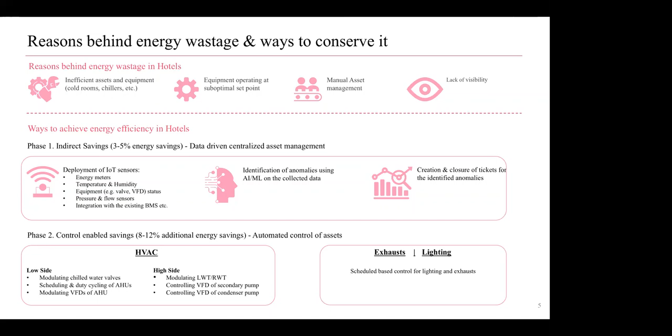And how do you then eventually get energy savings? If you do very detailed monitoring through different sensors, get the data, pass on that data to automated algorithms based on AI and ML, that create automated tickets which can then be rectified, and those rectifications lead to, let's say, 3 to 5% energy savings. You can then get an additional stage saving of 8 to 12% by doing automated controls.

These controls could be largely on the HVAC side, because HVAC consumes about 40 to 60% of the energy consumption in buildings. Within HVAC, it could be on the low side, high side, and then beyond HVAC, you could control exhaust and lighting as well.

Rather than being more theoretical, I'll let Mr. PK talk about his 4 decades of experience and how he has seen wastages in buildings and how he has worked on overcoming those wastages. Then we'll go deeper into the technical aspects of it. So, Mr. Goel, over to you.

Thank you, Amarjeet. Thanks to ISHRAE chapter for inviting me on this important webinar. I'm very happy to see that a large audience has joined this webinar on this important topic. My experience with air conditioning, HVAC, and controls goes back almost 3 to 4 decades.

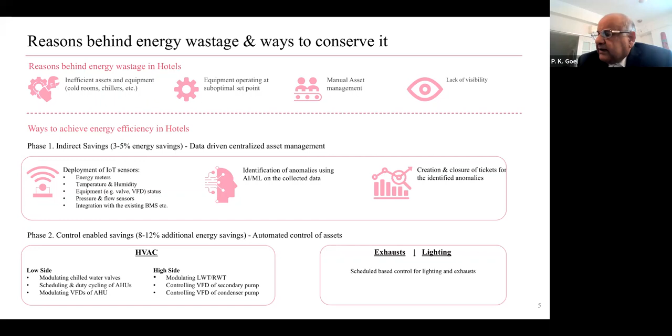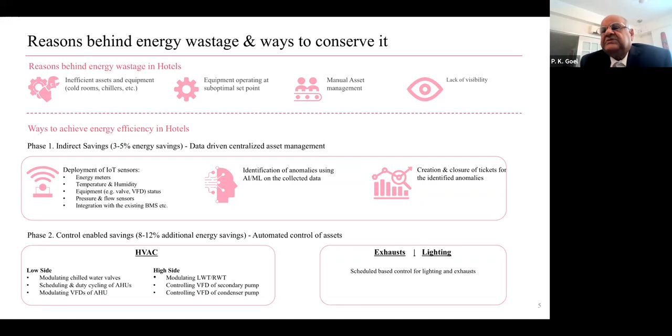So over to you, Amarjeet. Thank you, sir. I think you very nicely summed up all your 40 years of experience into a few key points, right? That connectivity is the future, right? All of us here, as we move into the future, whether as system integrators or HVAC engineers, etc., connectivity is going to be there in one form or the other, whether it is OEMs themselves providing connected equipment, or very easy to deploy, low cost wireless devices that can, in a plug and play fashion, provide data in a very, very easy manner, as you mentioned.

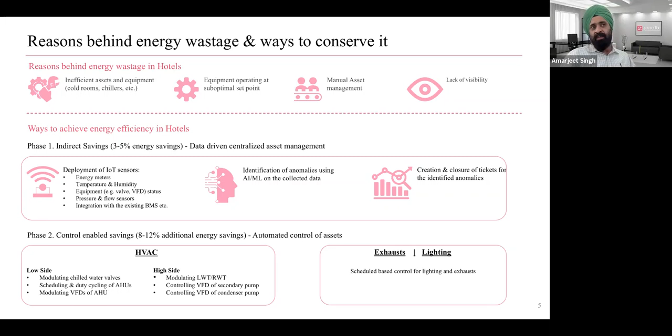So as this connectivity becomes a reality, which it already is, we can see how we can create a meaningful impact on global warming. I think this year is a real wake up call. The temperatures in April have been what we have never seen in the last 60, 70 years, right? Many of us were not even born in those durations, right? I think nature is giving us a wake up call that we better put our act together, right, and do our bit, or else the coming generations will suffer. And many of us who have kids really are concerned about that coming generation, right?

Buildings consume about 40% of the global energy, and within buildings, HVAC consumes roughly about 60% of the building energy, right? So overall, HVAC consumes roughly about 25 odd percent of global energy. And if we can save, let's say, 10-20% of that HVAC energy by doing the right things, we are talking about 2.5 to 5% impact at the global scale, right? Especially with this Russia-Ukraine conflict happening, etc., there are these global political and environmental impacts that are pushing us to put our act together.

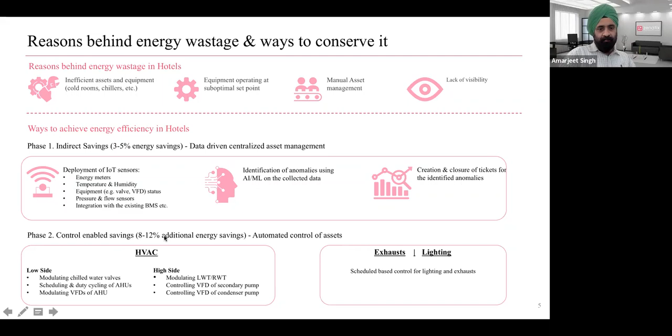So, where is the gap in the building management system, and why is there a need for IoT? Again, I'll use some statistics.

If we talk about buildings which are more than 100,000 or 150,000 square feet, in Western countries like Europe or US, 50% of the square footage of such large buildings already have automation systems in one form or the other. The same percentage when it comes to India is very low, roughly about 5 percent. And many of us know the reasons - many of us have seen several of these automation projects fail.

So of course, India and developing economies have a huge opportunity even for large buildings. But as Mr. Goel mentioned in the earlier slides, when it comes to smaller buildings, less than 50,000 square feet, globally it's actually a very big gap. Less than 2% of the buildings, even in Western developed economies, have automation systems, because the way these systems are built, they are very expensive, wired. If a building already exists and is operational, it's very difficult to deploy, very high upfront capex. So people can't justify the ROI. Very little centralized visibility.

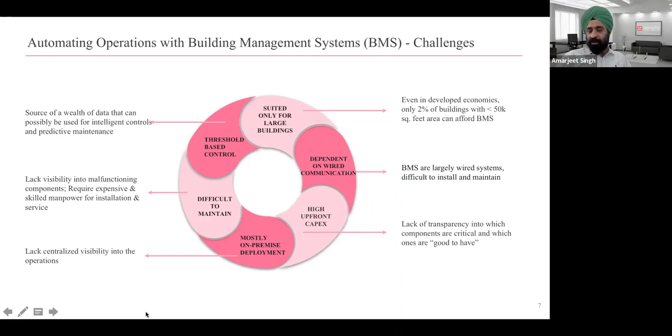I think that is where the world of automation, especially building automation with IoT, is moving. It's a paradigm shift that is going to happen in the next 3 to 5 years, and definitely India has that opportunity to be the global player, creating these new tools and technologies, not just for local consumption, but actually exporting them - exporting this knowledge created locally, made in India, built for the world.

Another thing, Amarjeet, don't forget our own tier 2, tier 3 cities. The Meeruts and the Modi Nagars and the Dehraduns may already have it, but the smaller cities - if we look at the penetration of BMS into our tier 2 cities, that itself is very small, and tier 3 is almost zero.

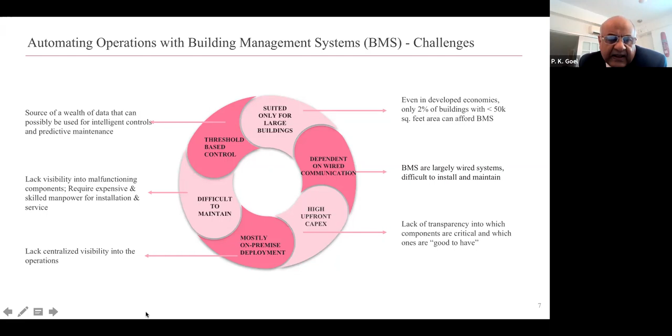With the newer stuff coming in, in 2 years' time you'll see a small vendor in a small town having connected systems. He already has internet thanks to payment facilities - he can't have UPI without a net connection. He doesn't depend only on the telephone line, he has a fiber connection even in a small place today. It's just an extension of that, and it has to come. This is development, you can't stop it. It's much better that youngsters get on this bandwagon. So I'll leave you to the presentation.

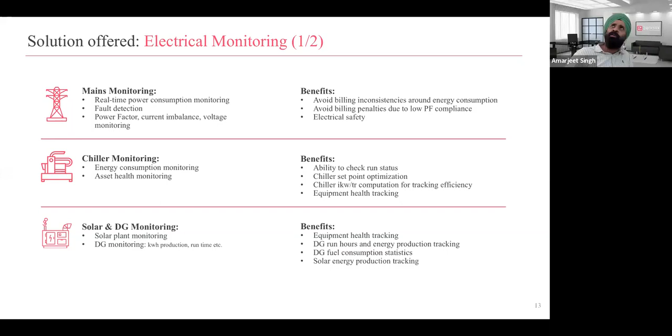We were telling them if there was potential DG fuel pilferage — whatever fuel they filled in, did they get enough units of production out of it or not? How many run hours did the DG operate at, and was it operating at the right capacity? You may have an over-provisioned or under-provisioned DG. All of these things can now be provided from the data.

We went further deeper into electrical monitoring at the low side of HVAC as well — AHU monitoring, exhaust monitoring, TFA monitoring, pumps monitoring, and within refrigeration units, phase-wise cold rooms and deep freezer monitoring, blast chillers. This gave us the health of the equipment, and since this is a catering company, it's also about food safety compliance — are perishable products being stored at the right temperatures, which is very important for them.

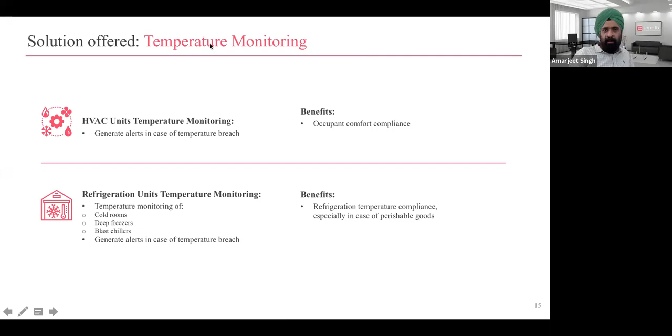Then we went to temperature monitoring. Within HVAC, we monitored temperature and generated alerts in case of a breach, and looked at whether occupants had the right comfort factors. Within refrigeration units, are they maintaining the right temperatures, especially for perishables? If not, is it because the equipment isn't healthy, or because the set points aren't maintained properly? All those actionable insights are given, rather than simply saying you're not maintaining the right temperature.

We went beyond monitoring into control as well. Beyond energy and temperature monitoring, we did direct control of AHUs, exhaust, TFAs, FAs, and pumps. We controlled several of them via VFDs — AHUs, exhaust, CT fans, and FA units. Direct control is the on-off control, and then we did control of some equipment via VFDs.

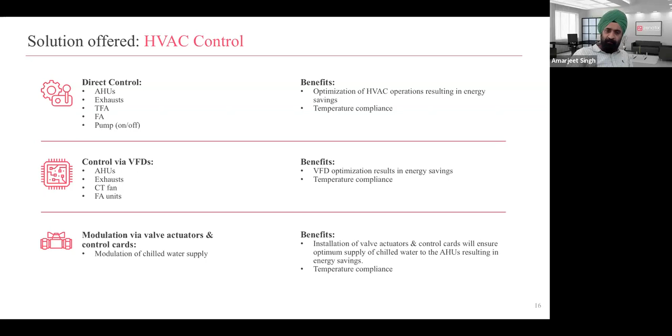We did modulation of the valves through our wireless IO cards, and they got deeper insights into whether any valves were stuck, or whether there wasn't an optimum supply of chilled water, resulting in energy wastage or temperature not being maintained properly.

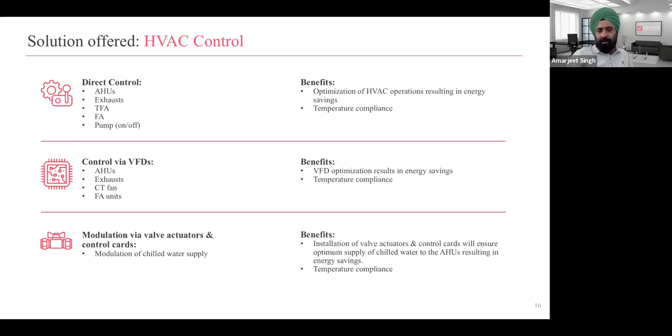So this was the real proof. We looked at the consumption for about 5 months before the system was installed, and for the 5 months after the system and automation were put in place. We showed real 14% savings on actual energy bills — it's not just that we were showing savings, the bills actually showed savings as well. The overall ROI was less than a year for them.

So these are kind of the ROI numbers, potentially unheard of. In the BMS, you don't even talk about ROIs in terms of energy savings. Here, we are saying that you do savings and you do get an ROI, and that is of course in terms of real money.

But beyond that, there is of course better temperature compliance. What does temperature compliance mean? For example, if a cold storage's ideal temperature is 2 to 5 degrees Celsius, and that ideal temperature is maintained for 16 hours out of 24 hours in a day, then the overall temperature compliance will be 16 divided by 24, which is 67%.

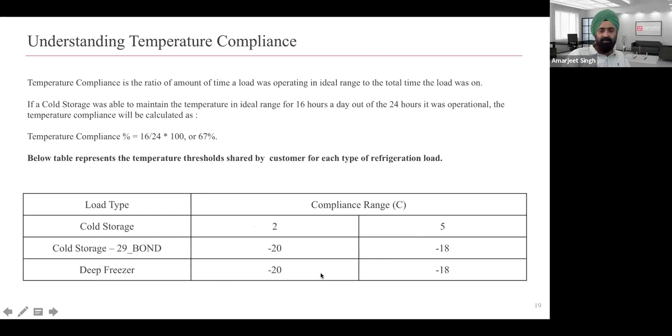So the customer gave us these compliance ranges: the cold storage should be between 2 to 5. There was another cold storage which should be maintained between -20 and -18, and a deep freezer which should also be maintained between -20 and -18. What we could show them was this.

On the x-axis you see different equipments, and on the y-axis you see the temperature compliance. It's a box plot where the middle line shows the median value, the box shows the 90 percentile, and the rest of the dots are outside of those 90 percentile. Here you can easily see, and we mark it, what is an ideal temperature compliance and what is a low temperature compliance.

So these equipments, up to E9, are largely operating in a low temperature compliance mode, either too cold or too hot. We then look further into their energy consumption to create automated tickets with deeper insights about why they are showing low compliance. The rest of the equipment, E10 through E21, especially towards this side, E17 to E21, have very good compliance.

So they're getting this real-time visibility, and any equipment any day can go from high compliance to low compliance if there is a fault in the equipment, or if somebody has manually put in a wrong set point. Once they do those corrections, either servicing is done or the set point is changed, and an equipment can move from low temperature compliance to high temperature compliance.

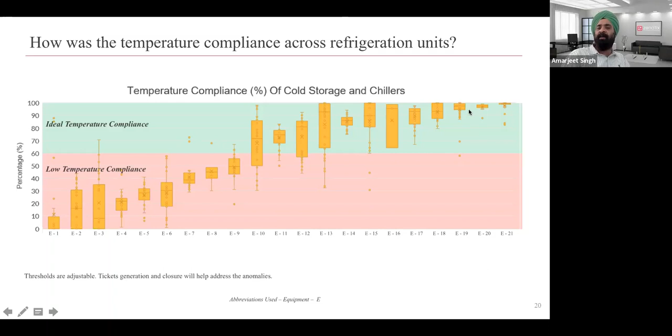We got into asset health as well, and I'll give you one example. Here we are showing the current consumption in the cold storages. If you look at the green graph, this cold storage is actually giving a duty cycle of its compressor - the compressor is going on and off in a nice periodic fashion.

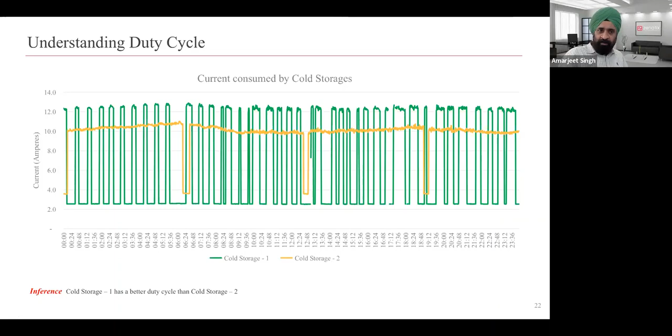While if you look at another cold storage, depicted by this yellow line, this is being on for most of the time and off very little. So what we do is we look at the duty cycling. This duty cycling should not be very low, because very low duty cycling either means you have put in a very low set temperature which the compressor cannot achieve, and therefore the compressor is always on, or perhaps the compressor has some fault, like a gas leakage, and therefore cannot cope up with even the nominal set point.

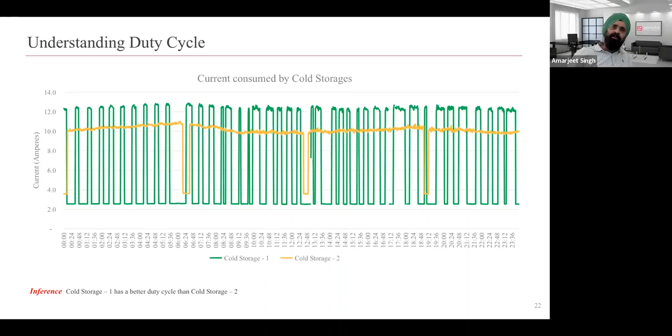So very low duty cycle is bad. Very high duty cycling is also bad, because that can make the compressor go bad from unnecessarily switching on and off. So your duty cycling should be in an optimal range, and our algorithms calculate this optimal duty cycling and show that.

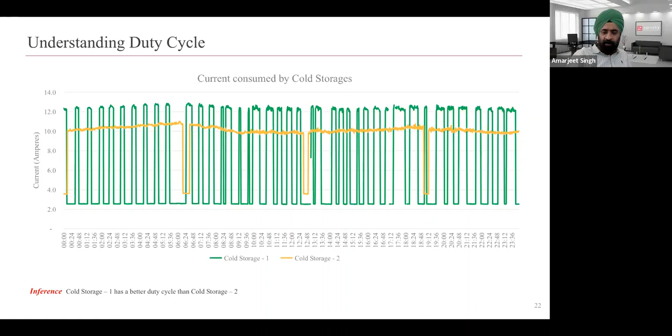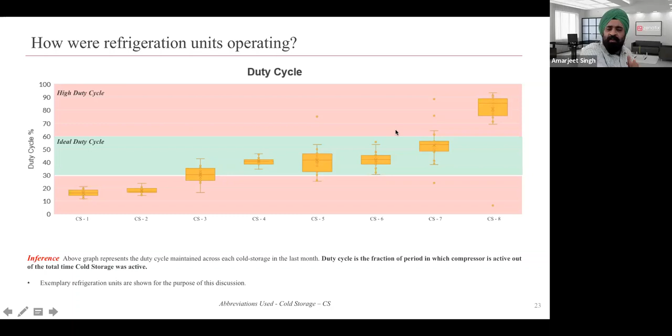And CS8 is showing very high duty cycling, which may eventually lead to the equipment getting conked off. So these are the examples of how we get into asset health monitoring.

Eventually, based on all this energy savings, temperature compliance, asset monitoring - what are the real values being delivered? I talked about electrical and compliance monitoring. They can compare their energy consumption with the bills, look at the power factor, voltage and current imbalances.

And make sure electrical safety is being taken care of in a real-time manner. The solar and DG are being monitored, because these are assets where you've put in a huge upfront investment and want to ensure they're used optimally - solars getting clean, DG of right capacity, no fuel pilferage, etc. The temperature, humidity, and AQI levels are being maintained, and you get real-time visibility on a dashboard like this of how your facility is being maintained.

And this is both a web dashboard, and you can get a mobile version of the same as well.

Then you start monitoring and automating controls of your assets. So these controls are now in your hands over the web. You can do time-based scheduling or automation of these assets, or action-based controlling as well.

You may say that at sunrise time, I want to control this; at sunset time, I want to control this; when the temperature reaches this value, control this; when it reaches another value, perform another control action. All of those control rules can be supplied through a web-based interface.

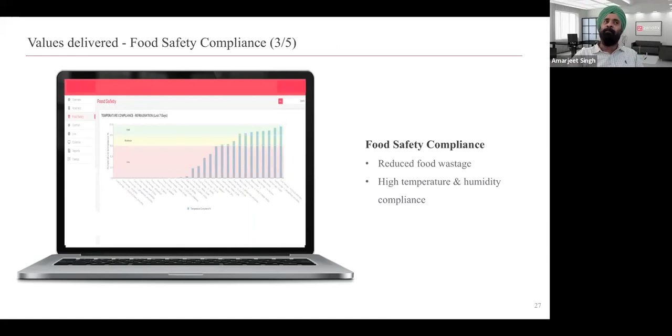Get real-time visibility into your food safety compliance - and being a catering company, they're very serious about it. You eventually save money, and that money isn't even being accounted for, because we don't have visibility into how much food wastage has been reduced. That's an added icing on the cake beyond whatever real energy savings we give them.

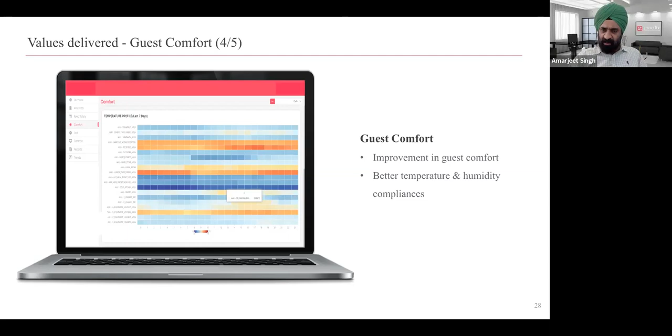Guest comfort - you now start bringing the real occupant into the whole scheme of automation. You can really ensure that the eventual guest in the facility, who is actually paying for it, is getting the right comfort level.

And then, of course, the predictive maintenance. There are complex algorithms running in the cloud that identify anomalies, create automated tickets with a lot of actionable insights embedded into them. And if the data shows the anomaly has been taken care of, automatically close the tickets - it's a full ticketing system with automated opening and automated closure.

Essentially, I'm not increasing the work of the facility manager. I'm putting in systems that throw in millions of data points, but I'm not expecting you to analyze those data points. Of course, many facility managers we work with have a whole lot of insights that we learn from.

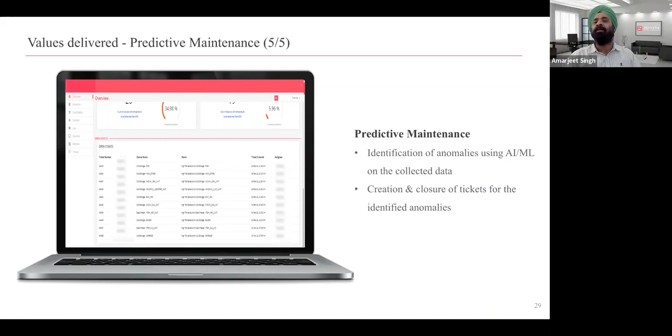We usually take those insights and embed them into our algorithms, so whatever we learn from each facility manager, we translate into algorithms and pass those learnings on to others. As we keep talking to more facility managers, we keep fine-tuning them. So our algorithms serve as a shared resource of information and knowledge gained from different facility managers, and we keep improving those algorithms with time.

So with this case study - let's say you as an end user or system integrator are interested in taking IoT to your building, or a building for your end customer. How can you do that? We propose an incremental journey.

Typical building automation projects in the BMS world are one-time - do everything together because you have to wire everything. We change that philosophy. We do a paradigm shift: take things slowly and reap benefits from it.

In the first stage, maybe just do basic sensing - put in some energy meters, put in some ambient sensors. If there is already a BMS, integrate that. If there is no BMS, adopt a wireless-first approach and automate your existing brownfield building.

Bring the data to a central place where our algorithms work on it to first give you a centralized dashboard and visibility, then perform automated anomaly detection to create tickets sent to your on-ground staff. Your central engineer may have real-time visibility into how those tickets are being addressed, leading to improved compliance.

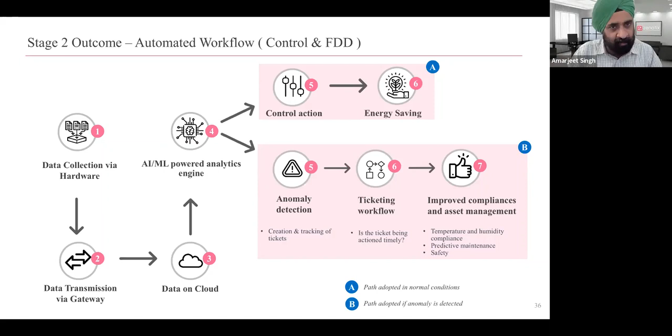Because you are now doing automated control, you're doing the set points in an automated manner, you start saving more and more energy. So going back to my cost example, you have spent 5 to 10 rupees doing stage 1, reaping its benefits, spend another 20 to 25 rupees in stage 2 and reap its benefits again with an ROI of less than a year, because now you are getting more savings due to the automated controls being put in.

Once you are past this stage 2, you can actually be in a place where you can connect an entire portfolio onto a common platform. This common platform could be for a customer who may have multiple properties, or for an SI who may have multiple customers, each with a single property as well.

So there could be certain properties that have BMS. Simply connect with the BMS. Do not try to replace it if BMS is already operating. If the buildings have a partial BMS, integrate with the BMS for whatever it is already doing. For the rest, put in that additional component of hardware, and make sure you have 100% coverage. And for buildings that don't have a BMS at all, deploy a fully connected automation solution.

Bring everything onto a common platform, make it a boardroom discussion. The owners are no more just the facility guys. The owners can be corporate business owners, corporate project leaders, regional project managers, beyond of course the site chief engineer. So suddenly you start with all this data, automated control, the whole talk about ROI, energy savings, guest comfort, condition-based maintenance, etc.

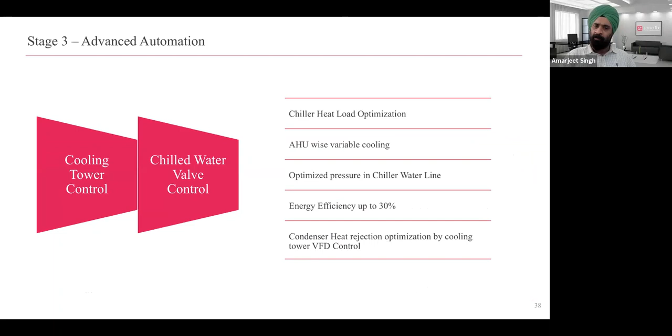Suddenly this moves all of these from boiler room discussions to boardroom discussions. Perhaps move on to stage 3, do more advanced automation. Move on to the high side. You can try to do a whole lot of chiller-based or chiller heat load optimizations, etc. That can give you additional energy savings.